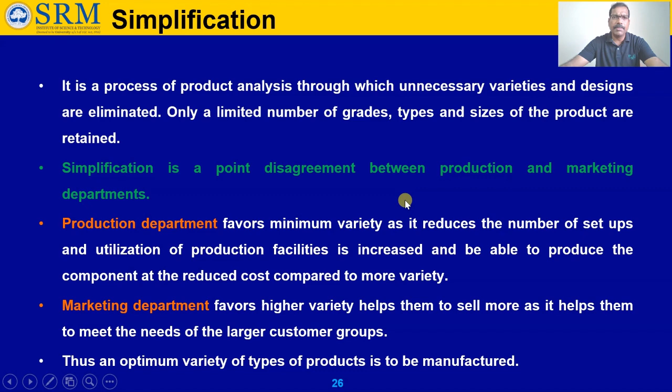The next topic we discussed, some advantages of simplification and also the disadvantages there. Then next we discussed standardization, where we have to standardize what materials we are using.

What products we are going to use, what machineries we are going to use, what method we are going to do, what kind of policy or principles we are going to follow. We have to standardize to avoid issues in manufacturing.

Okay, so that is what standardization is, where we discussed the interchangeability concept. So what is meant by interchangeability is a concept like...

If one particular product is being manufactured by multiple operators, by various machines in various locations, in the sense, all the components should have a desired quality, right?

If it is not in the expected quality, we can't utilize it. Everything cannot be assembled or manufactured at one single place by a single person or single machine. So once the number of components and demand increase, we have to distribute the components to be manufactured through multiple people, multiple places, multiple machines.

In the sense, everything should be of desired quality. For example, a worker, say number Y, is making one component in one industry, which is going to be assembled with another component Z made by a different worker in a different location, and both should be assembled.

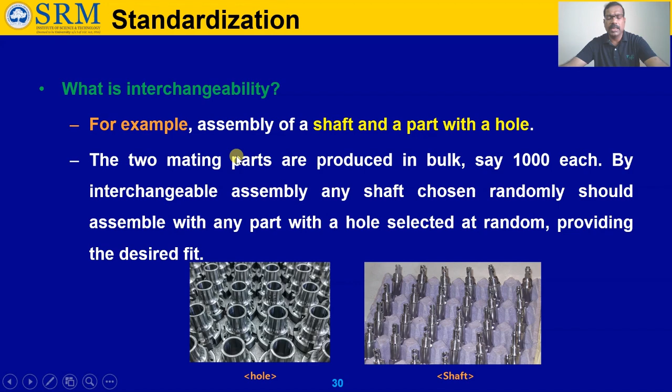Okay, so what is the objective of standardization we discussed? If we make standard components, we could be able to reduce lots of wastage, reduce inventory, and also reduce the accounting work, and we can reduce the cost of the product.

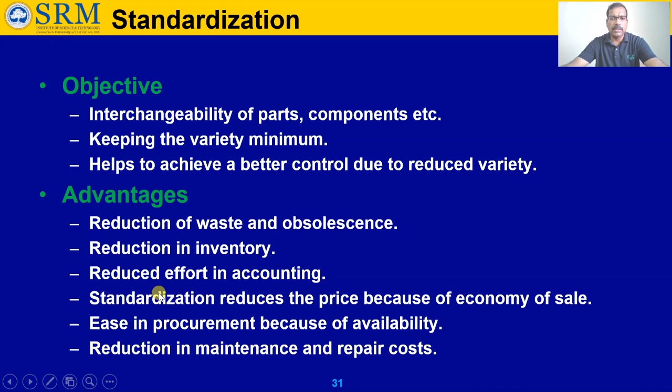Of the individual product, so that overall cost saving will be more. So this is all about standardization.

Then, in the sense of standardization, there is a broad category classification. For example, basic classification like scale and weights, voltages, limits and fits, and surface textures required. So these are all the things.

For example, if they are making some weight, say one component should be 200 grams, and it is going to be assembled into one critical component, that weight is very, very important. You simply can't add some basic weights; each and every gram or milligram matters for the final assembly, right?

So weight should be maintained. If they say this particular component should be of this much kilogram, gram, or milligram, it should be there. Then only the overall weight will be maintained as per the original plan. If not, the company is not going to work out.

And limits and fits, for example, loose fit, interference fits, lots of fits available, right? You might have studied this in computer-aided design or drafting principles, right?

If you want to assemble one component to another, particularly the mating components or surface mating, or hole base mating, the surface finish should be maintained properly. Otherwise limits and fits should be properly maintained so that it is properly assembled and the power or energy will be transferred without any faults.

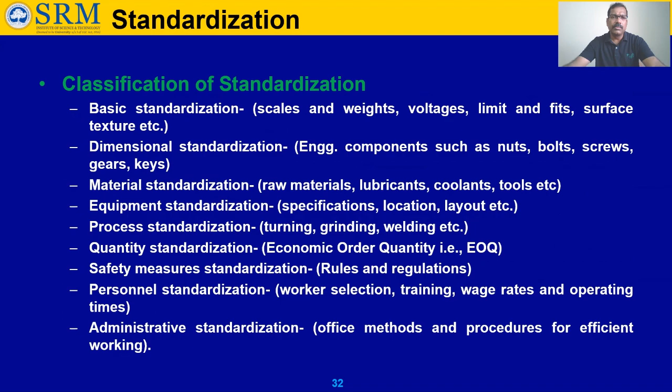So what are the three things we saw? Just to recollect you guys, simplification is the first step, then we have to do the standardization, and the final one is the specialization. With these three principles, if we work out, then only the industry or manufacturing industry will run in a smooth manner. So every industry is following that, and you guys need to practice that.

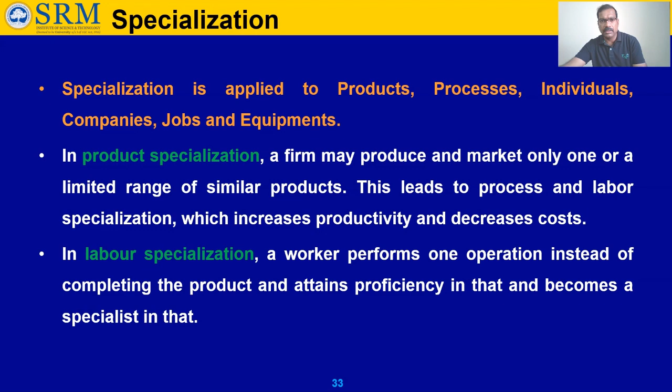Then another one, we discussed about the interchangeability concept in terms of the standardization principle we selected. For interchangeability, another opposite word or principle, if we say, is called selective assembly. What is meant by selective assembly? For a selective assembly, components are measured and sorted into groups by dimension prior to the assembly process.

This is done for both mating parts. Again, the components are measured and sorted into groups by dimension. For example, if you say like a hole and shaft, here there is a rod or shaft, and this component there is a hole. So what they make, in terms of interchangeability concept, any of this shaft will be going inside this hole. For example, 1,000 shafts made, this 1,000 shafts will go inside this particular hole. That is the concept of interchangeability.

But in terms of selective assembly, they make 1,000 of component A and also component B. The component A and B, they make 1,000 of each. Then the 1,000 components will be categorized or sorted out based on the measurement of dimensions. For example, what is the diameter of the particular piece with the particular tolerance value. Similarly for the hole, what is the dimension of the particular hole?

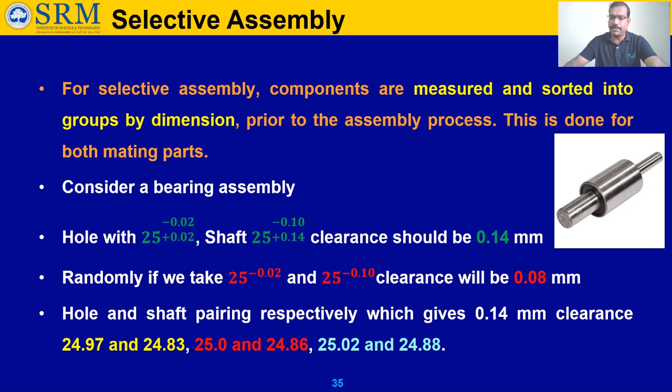Then we'll move on to CIM, and what are all the components available. What is CIM? I will discuss it now.

CIM is Computer Integrated Manufacturing. Everybody knows about that. So where did it come from? In the 1970s, a book explained this. The author Joseph Harrington mentioned that CIM is the integration of total manufacturing enterprises by using integrated systems and data communication, coupled with new managerial philosophies that improve organization and personal efficiency. This is what was given in that particular book in the 1970s.

So what is the concept here? It is mentioned that total manufacturing enterprises have to be integrated using data communication, and new managerial principles or philosophies are also integrated together to improve the organization and get better efficiency. This is the CIM concept.

So where did the CIM concept come from? It comes under the digital manufacturing principle. What does digital manufacturing mean? It can be defined as an integrated approach to manufacturing that is centered around a computer system. Digital manufacturing is the concept of integrating the approaches carried out in a particular industry through a centralized mode using a particular computer system.

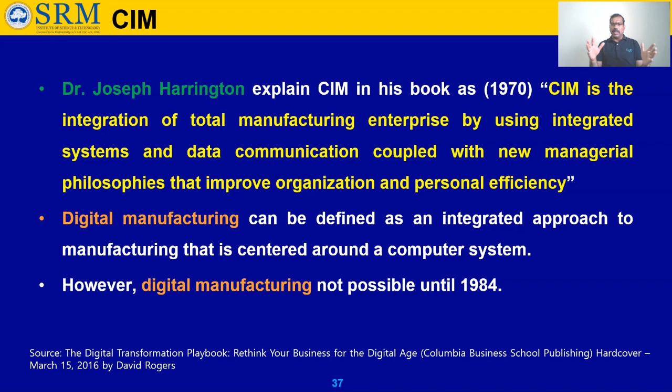Since the CIM definition came out in 1970 in the book, did they implement that digital manufacturing concept then? No, this didn't happen during that time. It took lots of time - until 1984, it didn't reach or get implemented in real industry.

So what happened then? In 1984, machine tool manufacturers, the Computer and Automated Systems Association, and the Society of Manufacturing Engineers (SME) - these three groups collectively discussed and came up with a solution for implementing digital manufacturing in the real world.

But when they implemented CIM, what were the challenges they faced? Connecting the devices - because digital manufacturing means integrating the manufacturing systems available in the industry through the computer. But the big challenge was connecting the multiple or different things in the industry. Let me give examples of these instruments.

This is a manufacturing machine, like a prototype CNC machine, or a big machine that can do machining. Then this is a pick and place robot that can also do welding operations, or pick and place. Then here is the quality check - inspection systems like a CMM machine or FARO. All these machines are available in our CIM lab, our robotics lab, and our CMM lab, in our Department of Mechanical Engineering, SRMIST Kattankulathur campus.

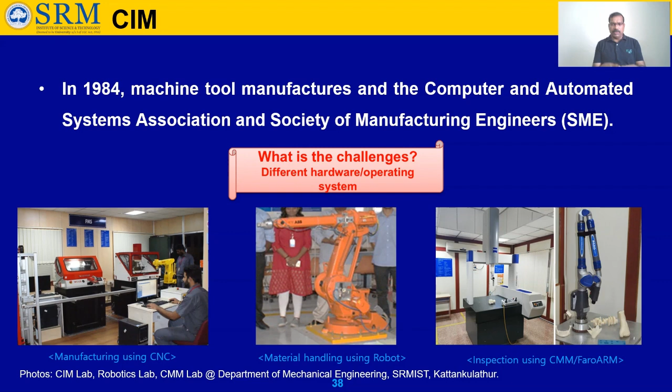So these people, like machine tool manufacturers and the Computer and Automated Systems Association, and the SME, they sat together and discussed, and they made lots of improvement policies and standards in order to make this connectivity happen. There in 1984, this process started.

And CIM has three letters: C, I, M. What is C for? C for computer, M for manufacturing, I for integration.

So general principle, everybody knows that computer is a machine that can be instructed to carry out a sequence of arithmetic and logical operations automatically via a computer program. It is a particular machine which can be instructed to carry out certain tasks in a sequential manner using arithmetic or logical operations automatically.

What way can we give the programming, the computer programming? Through the program, we can define how we have to do the operation. For example, if you consider an NC or CNC machine, using G codes and M codes like arithmetical and logical operators, we can write the coding and sequentially instruct the particular CNC machine to do the manufacturing operation. The programming will be written through the computer and it will be fed to the particular CNC machine.

So this is what CIM is. This comes under the C of CIM.

Next one is manufacturing, which is M. It is the process of converting raw materials into useful products, tangible products. Again, we discussed the difference between manufacturing and production. Tangible and intangible both come under production, but only tangible comes under manufacturing.

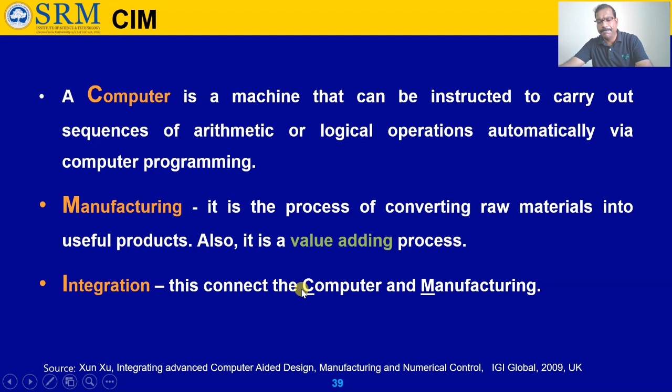So what is the definition? These definitions I took from an MP Groover book. It is the manufacturing approach of using computers to control the entire production process. Computer here is not only for programming alone, it also does the integration, so to control means integration of the entire production process.

This integration allows individual processes to exchange information with each other and initiate action. It allows the machineries or processes to exchange information between each other.

For example, multiple machines or an individual machine, if you take a CNC machine, once it is doing the grinding or turning operation and attains the desired dimension, the depth of cut or feed will be stopped, the tool will go back to its position, and the spindle will be stopped, the rotating spindle in the CNC machine stops.

Then the door will automatically open. The pick and place robot will go inside the particular CNC machining center, take the component from the spindle, and put it in the tray. Then the conveyor will move the component from one machine to another. The robot in the next machine will take that particular component and feed it inside to the spindle of the CNC machine for further operation, like doing some drilling. So how is it all connected?

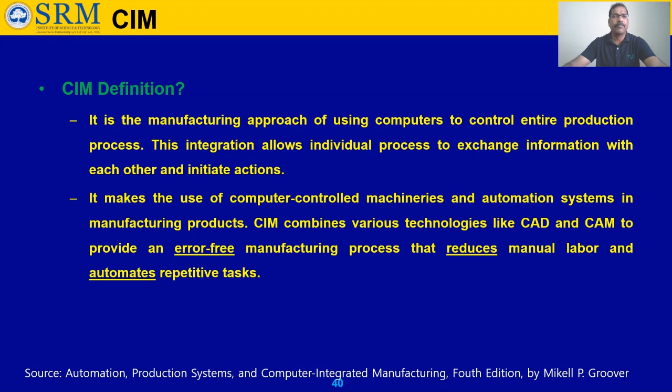Then in a CIM system, the functional areas include designing, analyzing, planning, purchasing, cost accounting, inventory control, and distribution, linked through the computer to the factory floor functions such as material handling and management, providing direct control and monitoring of all the operations. So these are all the functional areas.

So what are all the functional areas? As I mentioned, designing, analysis—all this comes under CIM. So every detail related to manufacturing or the product comes under computer integrated manufacturing, and all these functional areas are linked.

It is connected through the computer with the factory floor function. What are the factory floor functions? Material handling system, management system, control and monitoring of all operations is one set. Another set is designing, analyzing, planning, purchasing, cost accounting, inventory control, and distribution. This functional area group will be communicated to the material handling system and other mentioned areas through the computer. That is what CIM is all about.

So what data flow is happening? As I said, communication is happening through the computer—this functional area is connected to the other parts here. How is it happening through the data flow?

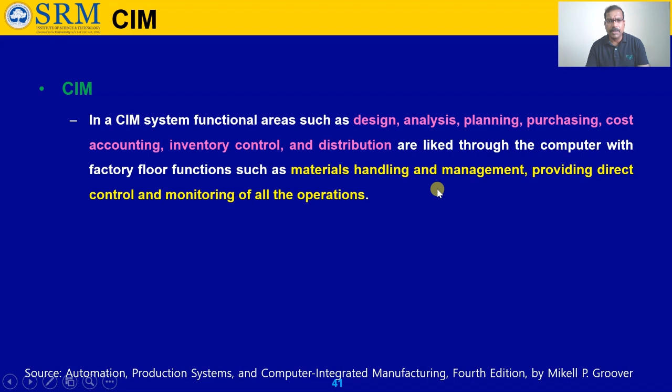There will be lots of data processed, right? So what is the data flow which is there? It is adapted from a particular reference. Okay, data flow in computer integrated manufacturing.

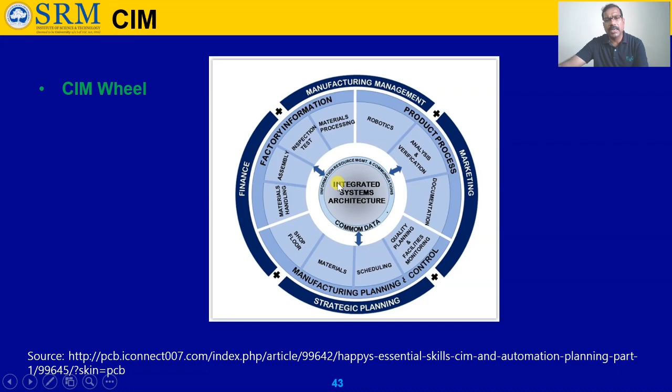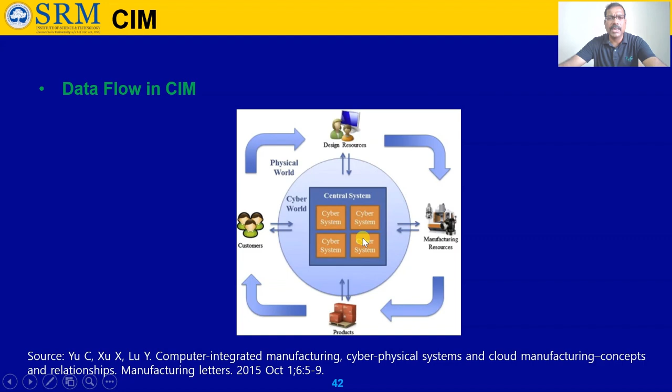So that is what is also there in the CIM wheel. CIM wheel is integrating everything through the integrated system architecture in the common data. So all this, like the design which comes under drawing or designing, the data flow I explained here, it is coming in manufacturing or logistics and customer or finance, everything will be connected. So with this, the CIM wheel, you could understand what are all the processes available in CIM, starting from the design till the dispatch and then maintaining all the logs.

Here, not only ending, once we send all the components from our assembly, from our industry, is our work done? No. We have to constantly keep track of the customer, whether they have any opinion or whether we have to do any improvement, whether they are giving any complaints. We have to track it down. This is also part of the processes involved in CIM.

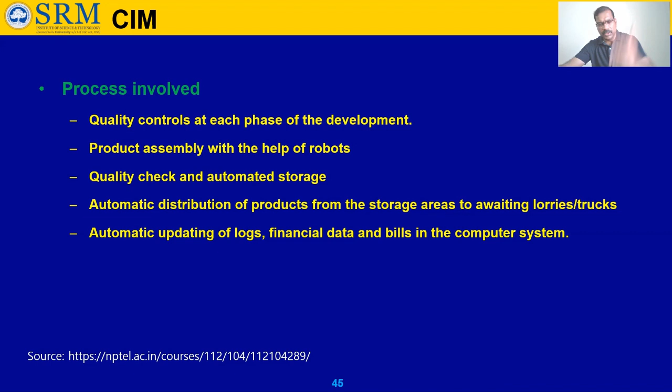Then what are all the advantages of CIM? It is basically error reduction. So due to error reduction, what will naturally happen? Productivity will improve. What is meant by productivity? With minimum resources attaining maximum output, right? That is the ratio, it's kind of efficiency we can say. We will be investing minimum resources or investment but attaining a huge output, that is what your productivity means.

So if we invest minimum investment and there is error in that, can we able to get the maximum output? Not possible. So error reduction is possible if we do proper planning or controlling everything stage by stage, phase by phase. That's why productivity will be improved and error also will be reduced through the CIM principle.

And reducing man involvement. So mostly we automate the system through computers and machineries, reducing the man involvement, and the number of process steps also will be reduced. Instead of doing multiple operations for a single feature, if we plan properly, we can combine many operations into one. Simple example: selecting a tool like a drilling and reaming tool combination, or combined punches. In cooker manufacturing and all, they do lots of punching operations, right? There will be lots of sheet metal with a punching operation, like a punching coin will be there.

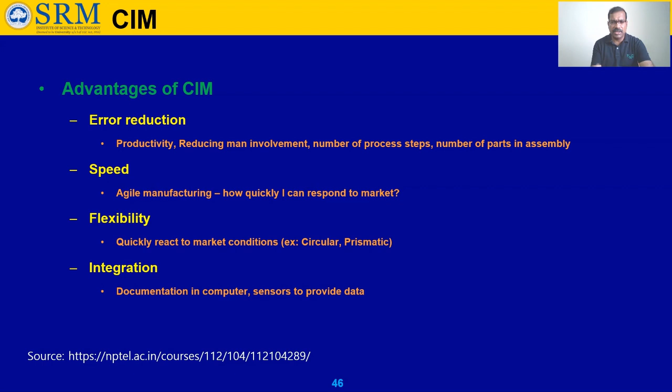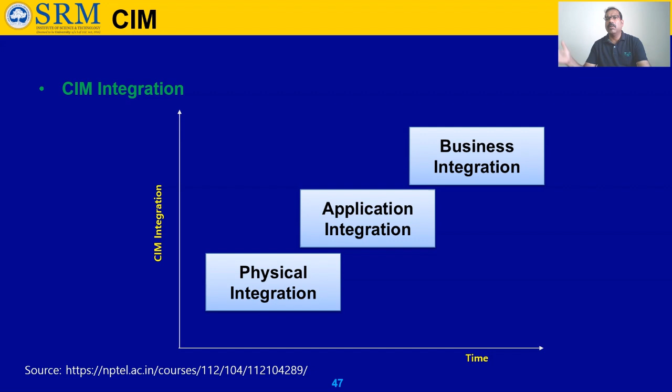Physical integration and application integration mean what all possible applications can be done with this particular component, and how we can integrate the machineries like machine A, B, C. Business integration means connecting financial planning, marketing team, competitors, and suppliers—all need to be connected. This all comes under system integration.

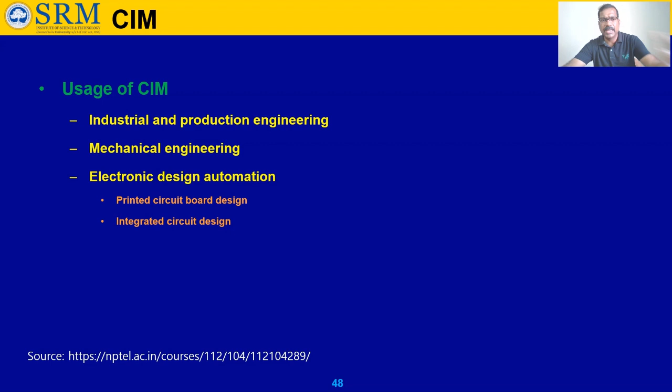Then what are the usages of CIM? Industrial and production engineering people use it, mechanical engineering people, and electronics people too—they use the same concept for PCB design and IC design, that is integrated circuit design and printed circuit board design. This is the basic usage. Now what are the challenges available?

The question is whether companies come under a common OS like an operating system. Nowadays we can say Windows or Linux are well-established OS. But when you go for industry machineries, various controllers are there, and they are not ready to come forward and integrate together because each has their own integrity or security, so they are not so integrating.

So what we can do, like when connecting the machine, RS-232 cables are there, correct category of cables. Using that we can connect. So integrating components from different suppliers is the biggest challenge in terms of implementing CIM concept.

Then data integrity, how we are going to keep the integrity or safety of that data, is another big challenge. It is also one of the challenges in our Industry 4.0 concept or digital manufacturing concept.

Then process control, how we are going to control that, what sequence the component is moving from one place to another, whether it is ready.

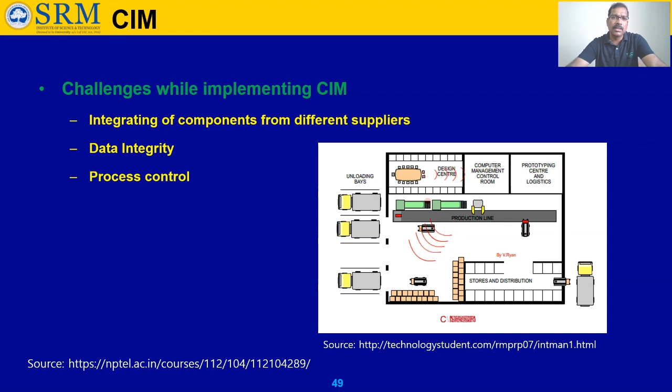What are the subsystems which come under the CIM umbrella? CAD, so many things - these are all the main ones. CAD, computer aided design; CAM, computer aided manufacturing; FMS, flexible manufacturing system, also comes under subsystem for CIM.

Then computer aided engineering, where you can do analysis. Then quality control, computer-aided quality control and assurance - that is what I added as A. And production planning and control (PPC), and ERP, enterprise resource planning. All these things will be considered in ERP, mainly focused on finance, but this also comes under CIM subsystem.

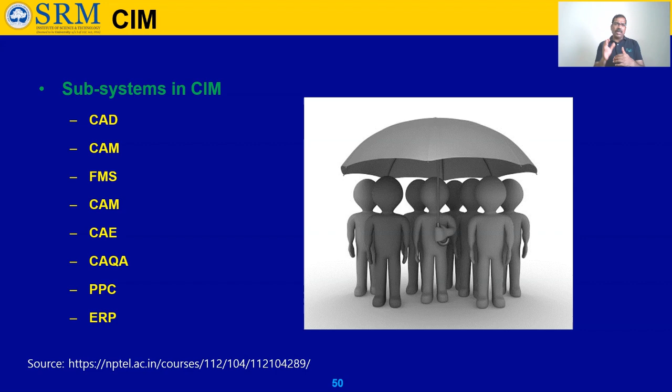Okay, so just understand - what are the devices which are used, as we saw in previous slides also. You will be having CNC machines, material handling machines, DNC machines, PLC, all come under the sensors, robots for material handling, and computers to process the data or interface that.

Software will be used to control the CNC machines, or for modeling purposes, or financing if they are doing that, they will be using software, or for ERP planning they have software. And controllers, networking and interfacing are very very important, like data communication through the network and interfacing. So these are all the devices and equipment.

So DNC is direct numerical control. It's like the next level for CNC. NC is the basic level, the next one is the CNC level, the next one is the DNC level. Like multiple CNC machines controlled through a centralized server machine called the DNC. So we'll discuss NC, CNC, and DNC in a later part of the lecture.

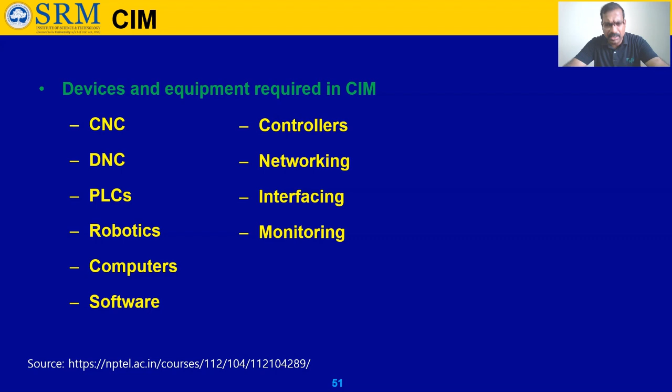So these are all the devices and equipment required for CIM. Then what are all the technologies? FMS is one of the technologies, flexible manufacturing system is one of the technologies. Then automatic storage and retrieval system is one of the technologies. AGV, automated guided vehicle, is another technology. Robotics, like pick and place robots, conveyors, comes under technology. And storage system or conveyor system is one of the technologies. And what software they are using comes under technology. So these are all the technologies available for CIM.

Okay, so with this I'll be ending this particular lecture.

In this lecture we discussed about 3S, refreshed the 3S principle - simplification, standardization, and specialization - and then we started with the CIM introduction or definition, where it came from, what components are available, what processes are involved, what is the CIM wheel, what devices are required for CIM, what challenges are faced in CIM, and what technologies are used under CIM. In the next topic onwards we'll move on to NC, CNC, and DNC.

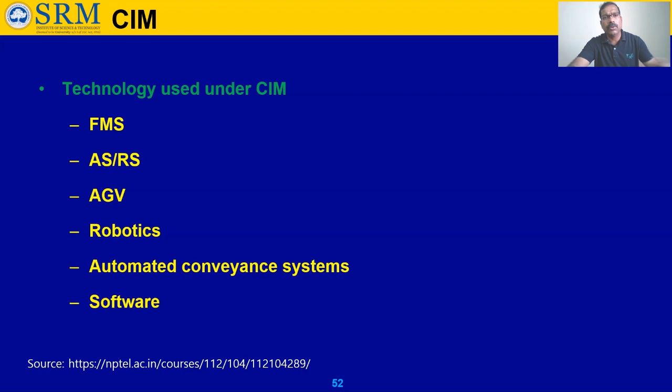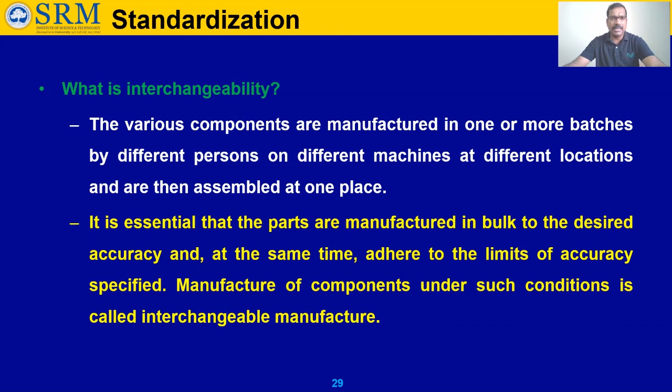So this is lecture 3 for unit number 1, Introduction to CIM. So in lecture 2 we discussed about standardization. For example, why standardization we discussed is all about...